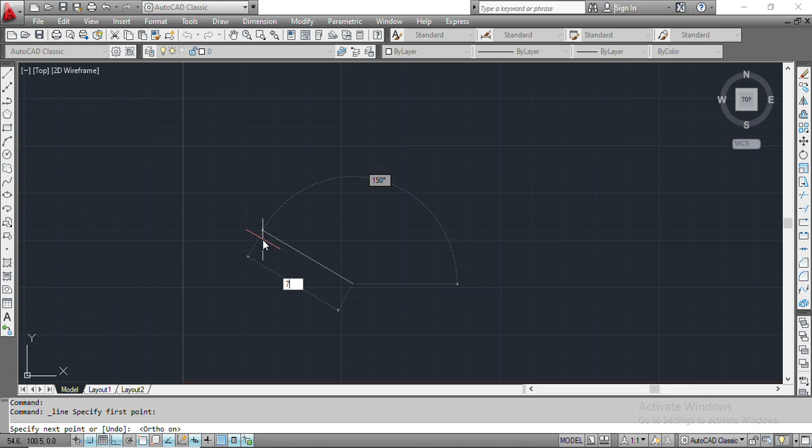The line, have your ortho mode on, that is 72. Change direction to 110, to 72, and again close it, close it.

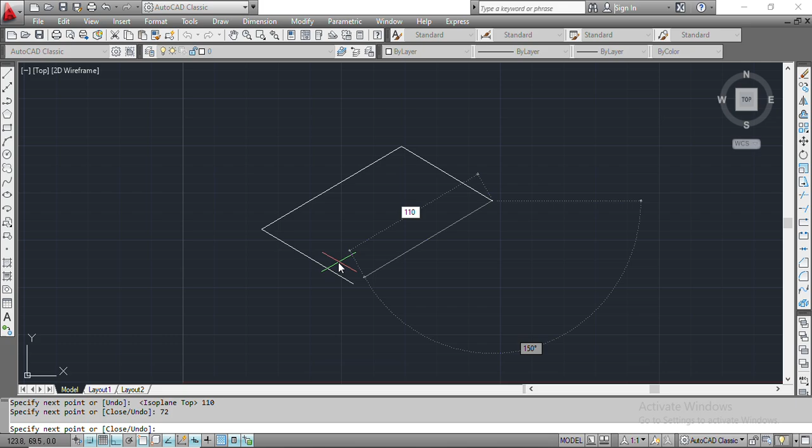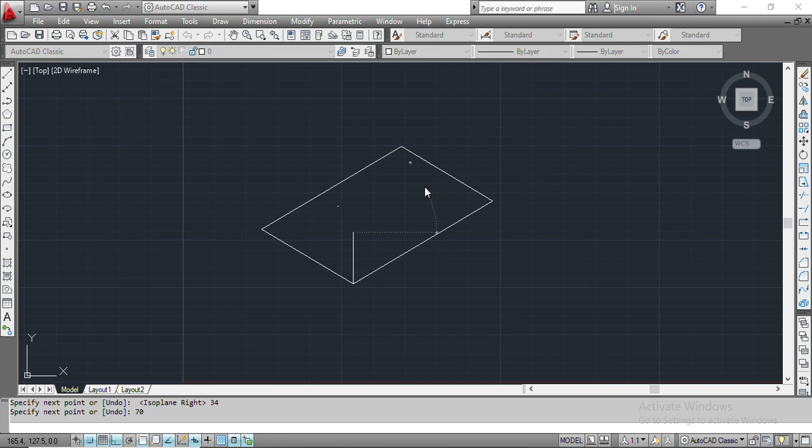From that we have change direction to a distance of 34, distance of 34. Let's run to a distance of 70.

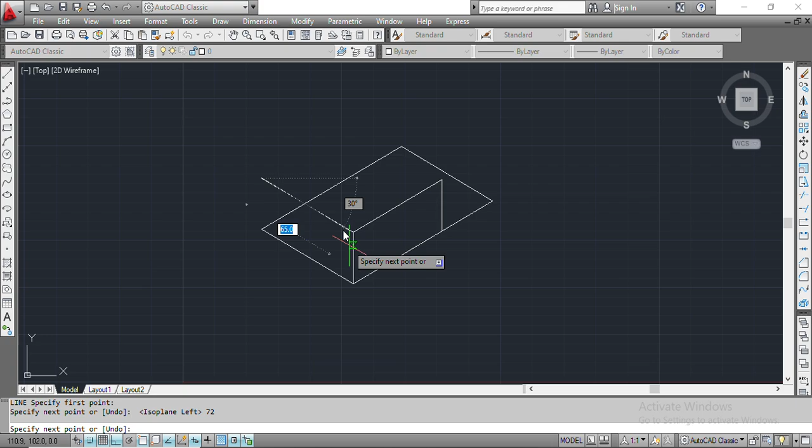Change direction to a distance of 72 and distance of 34.

Change direction to a distance of 70 and join to distance of 72.

Well and good. Now draw ellipse, isometric ellipse, isometric ellipse from this center.

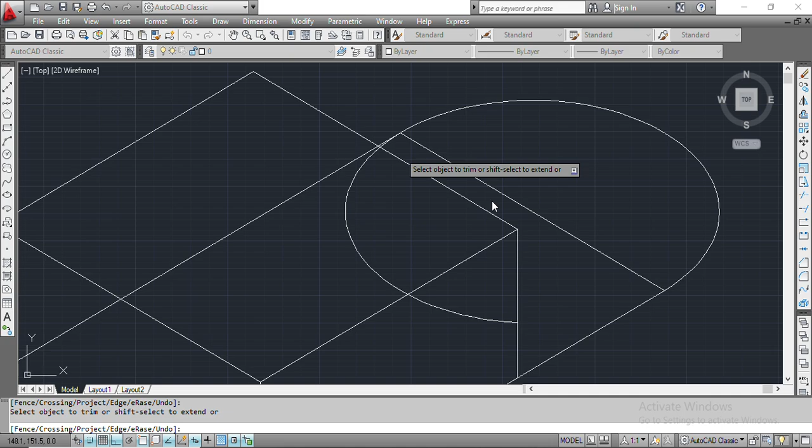And it should have that diameter of 72. Trim it.

After that, go back to the figure and have it. The total height is 34 and there is a height of 20.

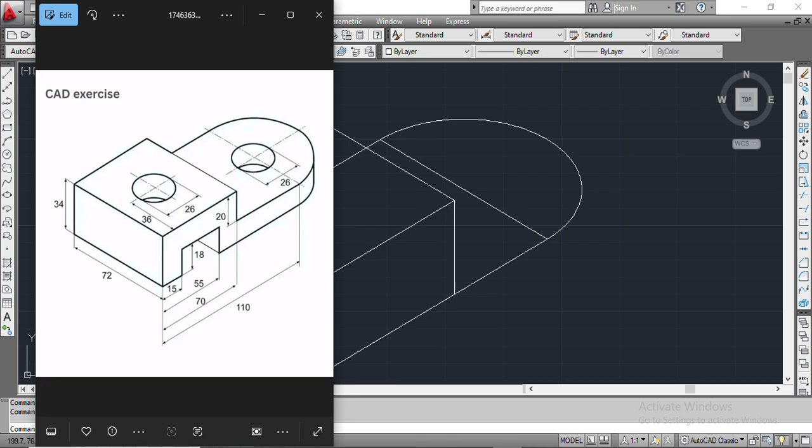So we are going to copy this to a distance of 14. Copy from the center, change direction to a distance of 14.

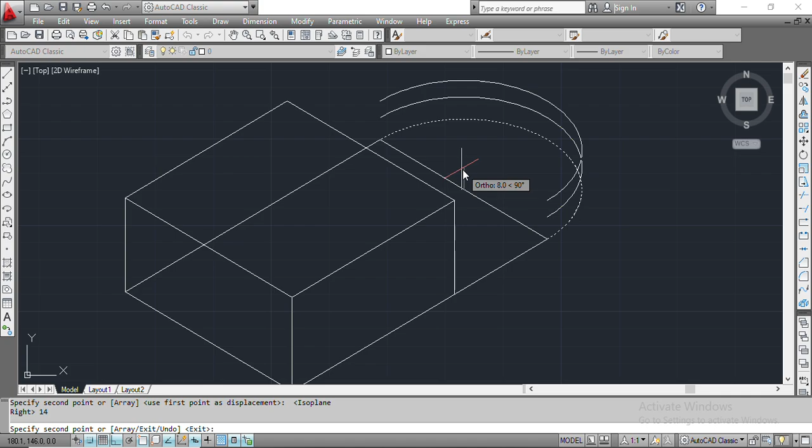Well done. So have the lines completed. So have it, the excess that we may trim.

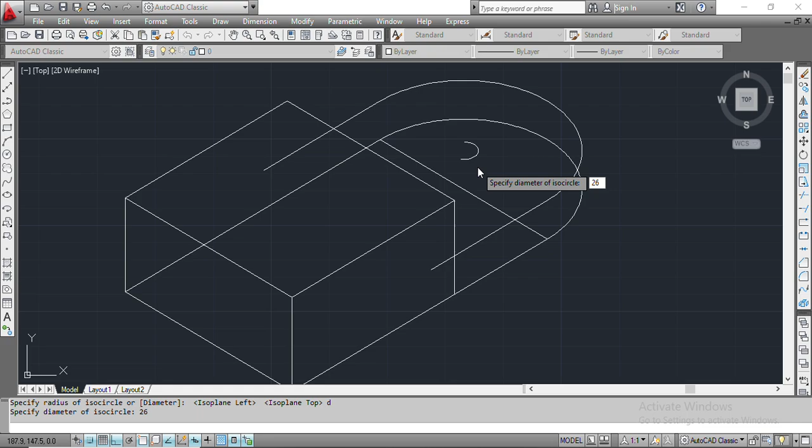Have another ellipse, which is isometric ellipse, and have it with a diameter of 26, so this, copy it. Well, that is done.

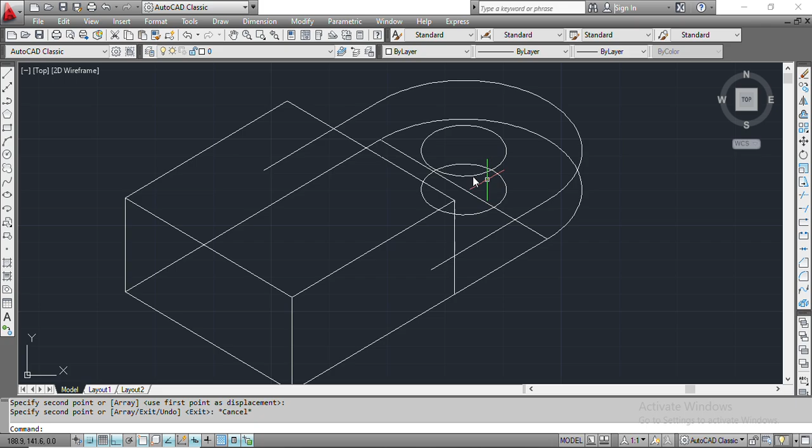So we are going to copy this, a distance of 18.

Then we are going to copy this, a distance of 15 and 55.

We are going to copy this, copy again, from this to this corner. It is a distance of 55.

Well done. We have one more. We are going to need a line from this center, a distance of 35.

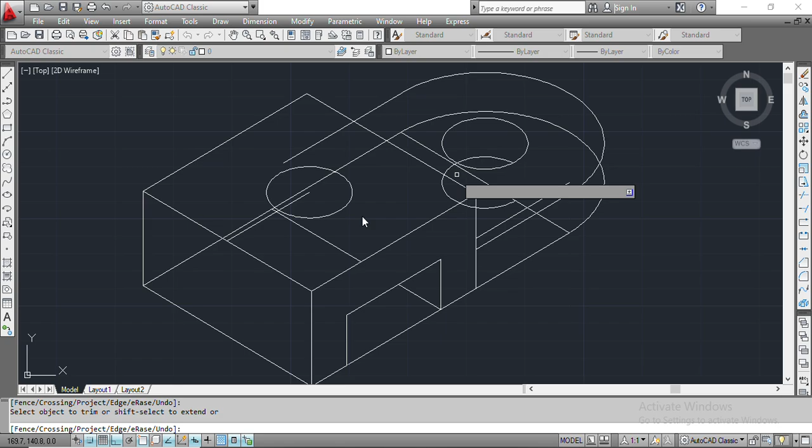So we are going to trim the excess. Good. Well done.

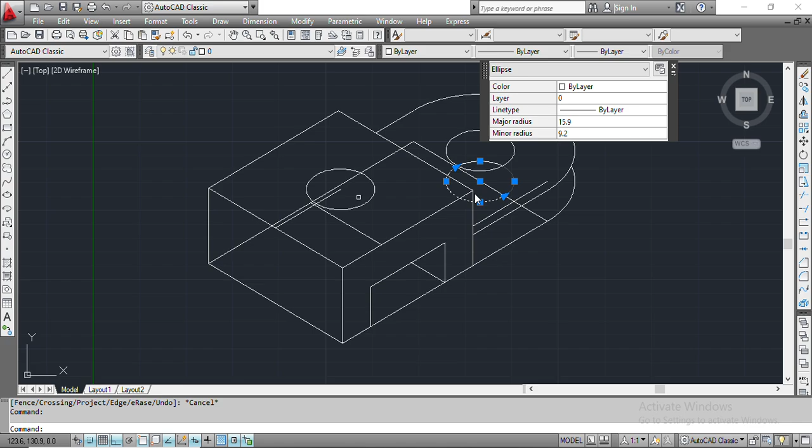So this is our final. One thing remaining.

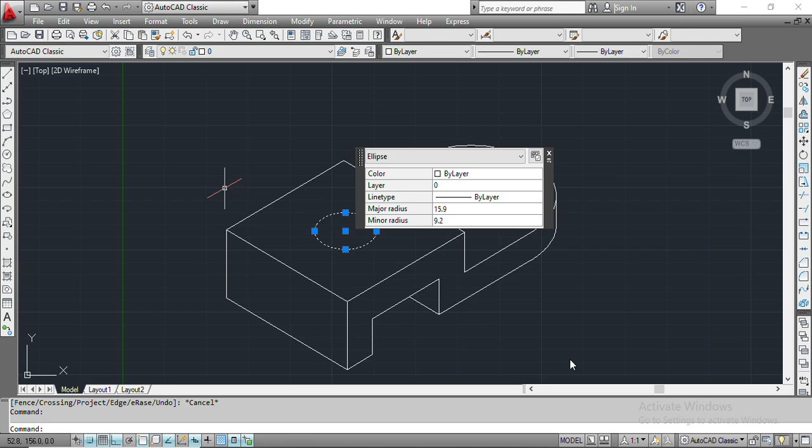Well, we can now check. Well, one thing remaining. We are supposed to copy this to a distance of 16.

Well, good. Yes, we can now check. That is the isometric that we are supposed to have.